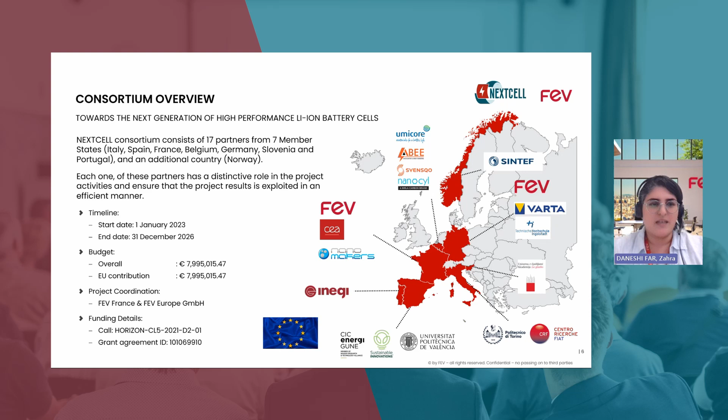As you have already seen the names of partners, we are 17 partners from 8 European countries, 7 member states and Norway. The project started in January 2023, so we are at the end of the second year. We are waiting to have good results at the end of the project by December 2026. The budget of the project was about 8 million, 7.99, and the funding was in the call Horizon Cluster 5.

As already mentioned in other projects, the challenge of research and innovation today lies in the development of advanced materials enabling high energy and high power densities, thanks to high capacity and high operating voltage. So the focus here is adapting the cathode materials, anode materials, and electrolytes and their interplay, considering high nickel NMCs for capacity on the cathode side, also spinel lithium-rich NMC for voltage, and on the anode side graphite containing silicon oxide. For the electrolyte, we are looking for a stabilized formulation.

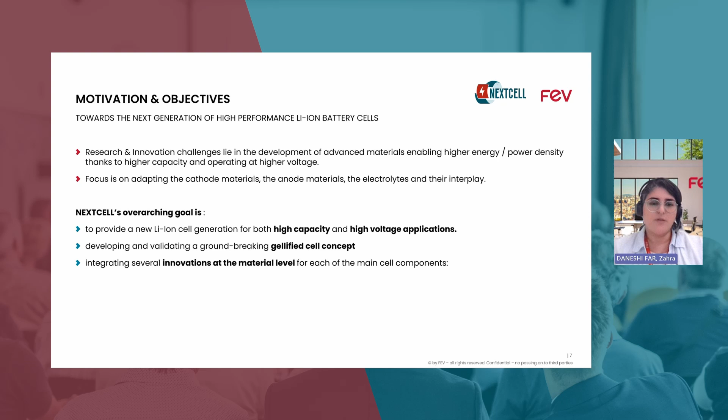In NEXTCELL, our goal is to provide a new lithium-ion generation for both high capacity and high voltage applications. For that, we are developing and validating the concepts, and integrating several innovations at material level for each main component already named. The goals are high energy density, physical and mathematical models, sustainable, cheaper and safer. For high energy density, we mean excellent performance in high capacity and high voltage applications. Physical and mathematical models are a key methodology to optimize and accelerate the research and development process for new energy storage technology.

By sustainable, it means optimization of the manufacturing process, reducing capital and operating cost of future gigafactories by avoiding the evaporation of solvents and the electrolyte filling step. Cheaper means a reduction of around 50% in energy consumption, and safer means safe cells, avoiding the presence of low boiling point components in the electrodes and the separator.

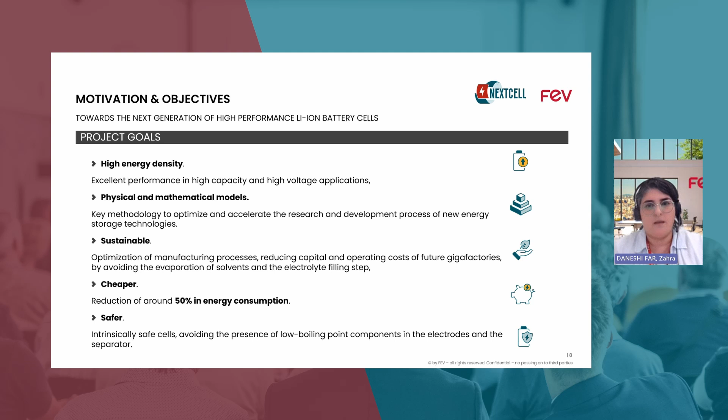The main objectives of NEXTCELL we can name in 4 axes. The first is to develop the material requirements for gellified cell concepts. The second is prototyping the concept to TRL6. The modeling of this gellified concept is the third axis, and evaluation of technical safety, sustainability and cost improvement is the fourth axis of the objectives of the NEXTCELL project.

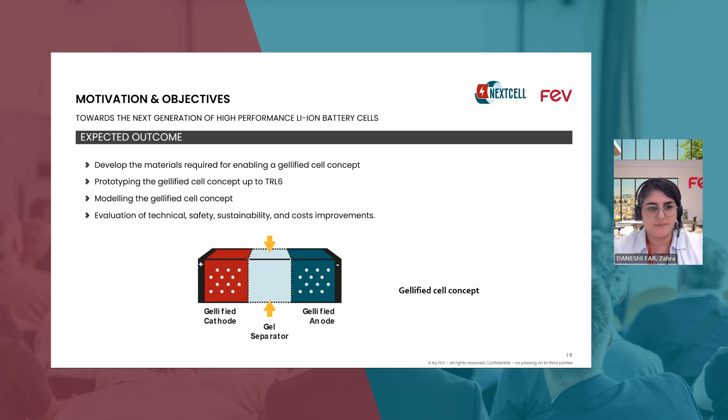To achieve this, let's have a visual presentation of the structure of the project. In NEXTCELL, the project work plan revolves around 3 main axes. First, in the main core, you have the prototyping. For prototyping, we have the requirement specification for these cell concepts and materials. Then in work package 3 we have the development of raw materials and definition of the continuous solventless production of the gellified electrodes and separators.

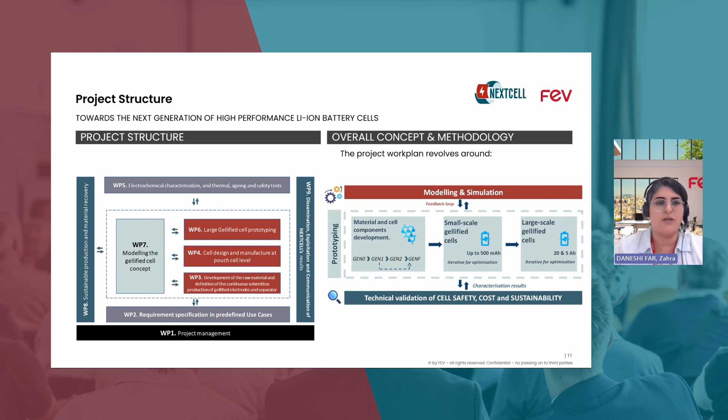Also, we have the small scale gellified cells, and at the end the larger scale gellified cells for the project. For this main prototyping side, we have work package 2 to work package 6 involved in the development. Let me go to the next slide so you can see the names of partners actively working in this axis. In this part, we have work package 2, which is already done, covering the requirements in the first year.

And then work package 3, which is in the middle to the end of this development of raw materials, which is one of the main steps of the projects. And we have work package 4, which is responsible for the cell designs and manufacturing at the pouch cell level. And of course, work package 5, which is for electrochemical characterization, thermal aging, and safety tests.

Then at the end of these steps, in this axe, we will have the prototyping of large gellified cell. The next axe, as I heard in other projects, they integrated modeling to the other work packages. Here we have separate work package for modeling, which is in continuous cooperation with the other work packages. You can see the lead and main partners on the work package 7.

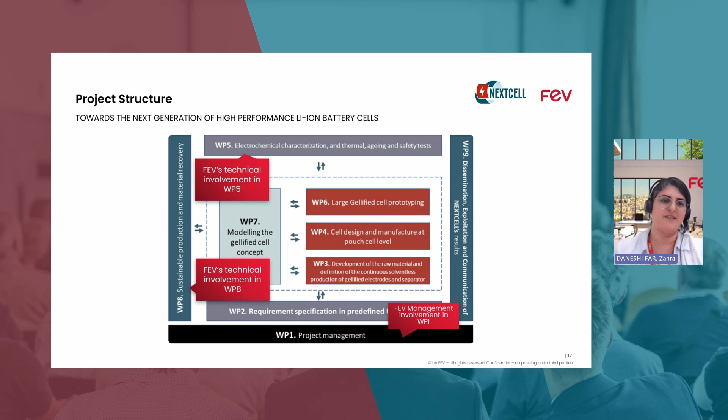So for the part of the FEV contribution and task in this NEXTCELL, FEV actually has a role in the project management, as you already said, and then we have the contribution to the work package 5 and work package 8 that I give the floor to Yanis, who will present the contribution to the project.

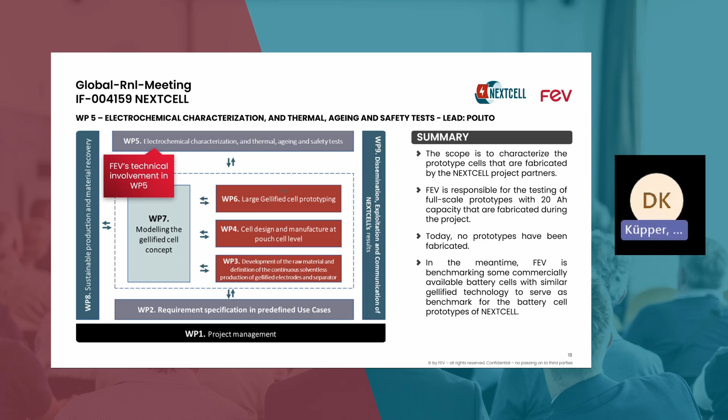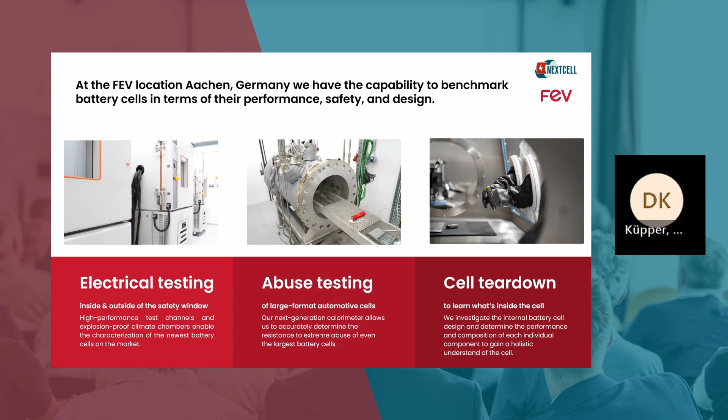Exactly, and as part of our benchmarking activities, we have had a look at this cell, as you can see right here. It's a rather small pouch cell, 31 ampere hour capacity. And now you would probably ask, okay, what is here the connection to the NEXTCELL project? And within NEXTCELL, of course, we will be testing these prototypes, but these are not yet reality. That said, we are not just waiting for them to come in. We sourced this battery cell specifically because the manufacturer claims that it is a solid state cell.

And since I am showing it to you today, you can already reckon what type of technology it is, right? It's a gellified cell. And of course, these are super interesting for us, for our battery system development efforts. So we had a look inside. And today I will show you briefly a few insights on this cell. So next, please.

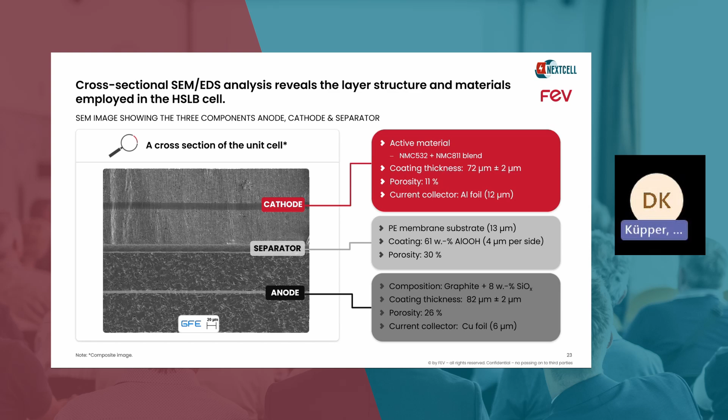And then lastly, looking at the cathode, here we have a blend of NMC 532 and 811, and exactly. So looking at this, we still don't see much that is particularly special. So for this, we have to have a closer look. And please go to the next slide. Exactly. This is the most interesting part of this cell.

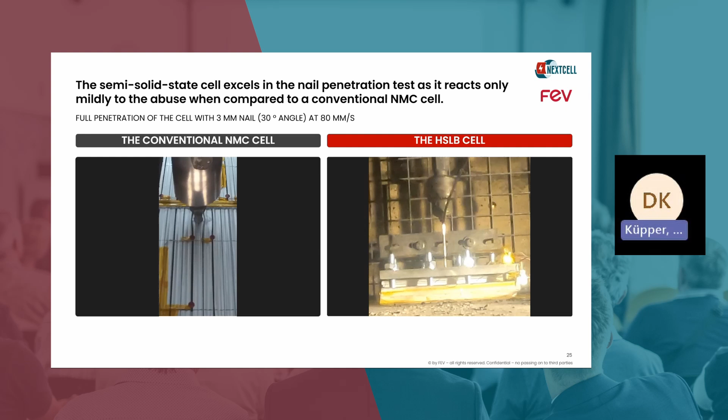Here we have a comparison of, so what we are looking at here is a safety test of a conventional NMC cell, as you would find it in most electric vehicles today, on the left-hand side. And on the right-hand side, we have the gellified cell that I have shown you before. And what we're doing here is a nail penetration test. So we're punching a nail through the battery cell. And so now let's see what happens.

Right. For the conventional cell, we see what we would expect. We have flames and an explosion, which cause a huge safety hazard within a battery system of an electric vehicle. And we see the complete opposite for the gellified cell on the right-hand side. In fact, we do not see a thermal reaction, and the maximum temperature that we observe during the nail penetration test is 59 degrees Celsius, which does not pose a risk of a thermal runaway event or thermal propagation.

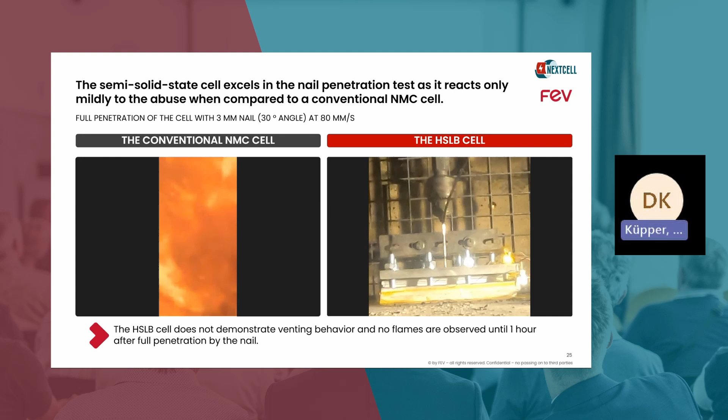And this, of course, has very big implications for the way we integrate these cells into a battery system. One outlook I would give here is that for this cell, which has an energy density of 270 watt-hours per kilogram, with this safety behavior as we've seen it, we could think about integrating it similarly to an LFP type cell, which would, of course, increase the battery system level energy density substantially.

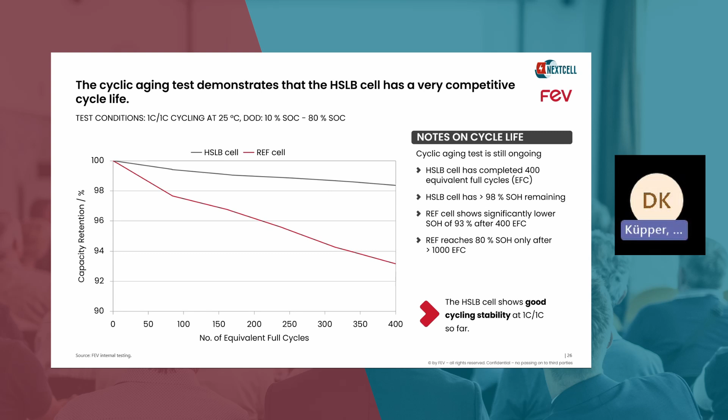And now the question would be, okay, where is the drawback of this type of design? Because there must be some drawback. And if we have a look at the cycling performance, we actually see that the cell does not perform badly in cycle life. So while we would expect that maybe a trade-off has to be made between safety and lifetime, this is actually, as we see it, not the case right here. Even at rather fast cycling rates of 1C/1C, the cell does not suffer too much and can deliver a competitive lifetime. Exactly. Next slide, please.

And since this is a super interesting technology that will be coming to the market very soon at a broad scale, would be my impression, we need to know if it can be cost competitive, because this is, of course, a very important aspect. And we at FEV have been modeling battery cells for a long time. And now we are focusing on modeling this type of battery cell within NEXTCELL.

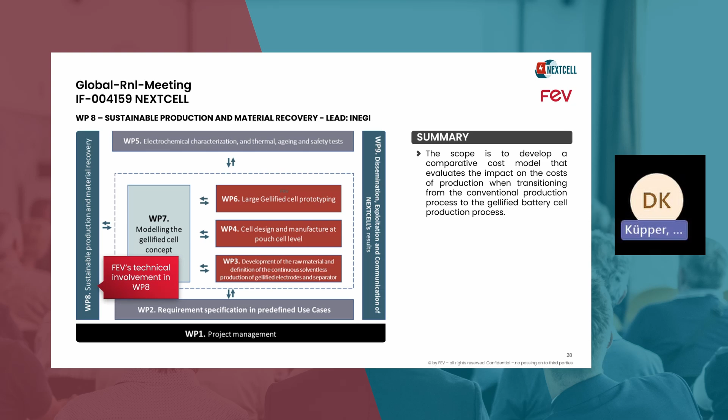And next, please. Exactly. And this is an activity that is part of work package 8, where we look at sustainable production and material recovery with our partners. And here, next slide, please. I won't go into all of the details, but how our cost modeling works in principle is that we try to assess all of the cost rates of the materials, of the cell design, and of course, of the production scenario.

And we first have to modify our conventional battery cell model, as we would have it for the cells that are on the market today, for the new type of battery cell that is developed within NEXTCELL, meaning the new production processes, the new materials, and so on. And these new inputs are then combined within the cost model, and then at the end we have a direct comparison of the cost breakdown between a, let's say, standard cell as it is on the market today and the gellified cell that we are developing within NEXTCELL.

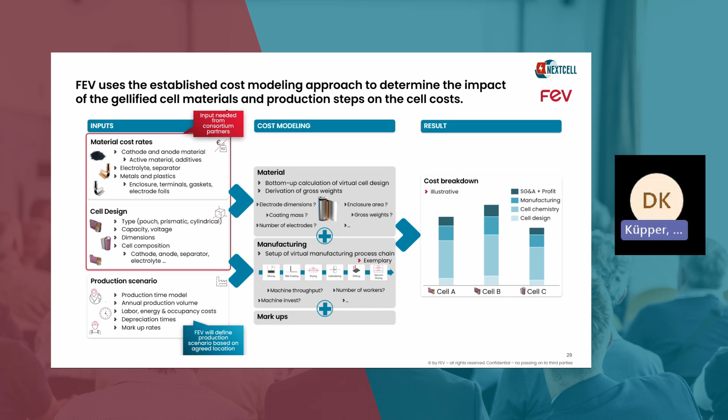Exactly. And with this, I think I'm already at the end of giving a short overview of our contributions to NEXTCELL. Thank you, Yanis, for the presentation.